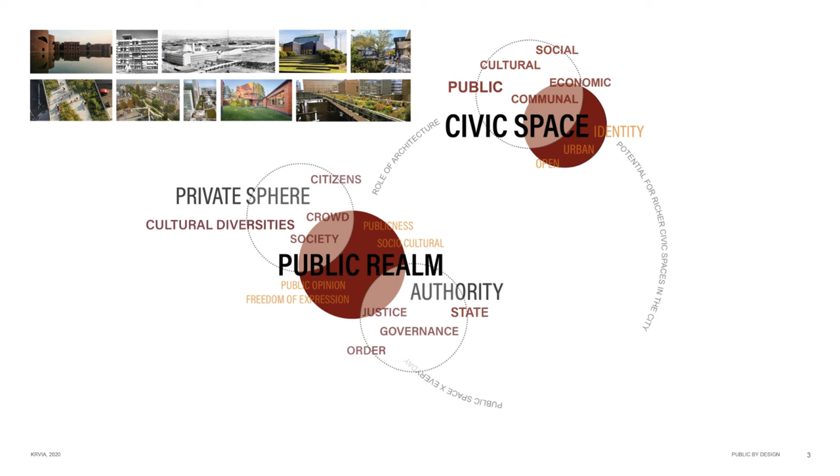For municipal architecture to truly identify as civic, there needs to be a blend of strong sociocultural aspect and a sense of architectural identity to it. The municipal architecture that is being built today lacks the same. These buildings become disconnected objects in the context, performing its bare minimum role in society. They even lack the aesthetic appeal when it comes to human perception.

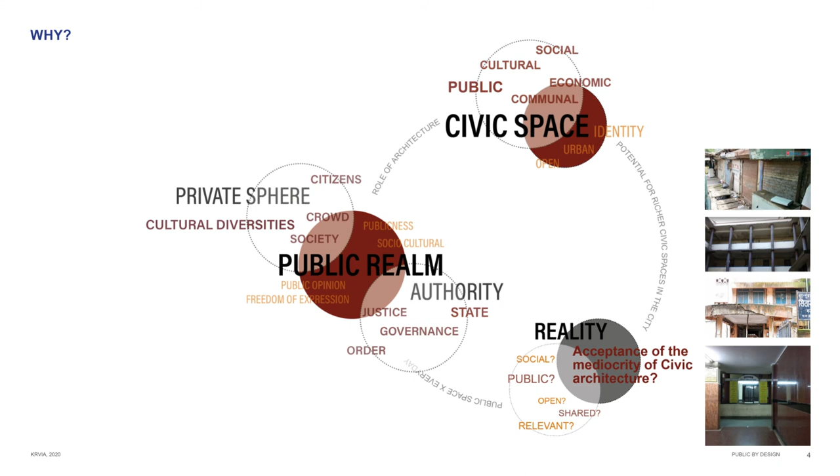Several such mediocre buildings exist in the case of Borivali. Borivali is a part of suburban district of Mumbai. It is one of the important halts along the railway network of Mumbai.

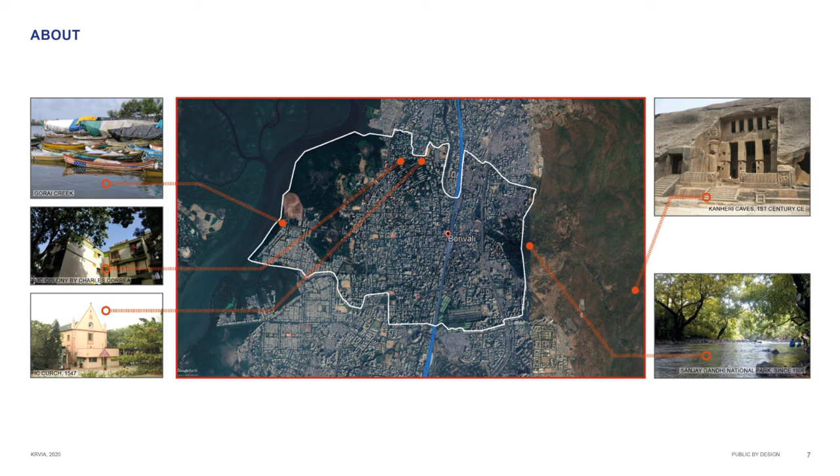Borivali sits between the Sanjay Gandhi National Park and Gorai Creek, which extends from the Arabian Sea. The significant architecture in the surrounding includes the Kanheri Caves, which date back to 1st century, Immaculate Conception Catholic Church building from the mid 16th century, and semi-public housing built by Charles Correa for Life Insurance Corporation of India in the 1970s. Due to the rapid development of suburban areas in the last 3 decades, today Borivali is as culturally diverse as any other region of the metro city.

The Borivali railway station area is the most active part of the region, a city center in a way. This is also the area which has the clusters of municipal buildings that are part of the context for this thesis.

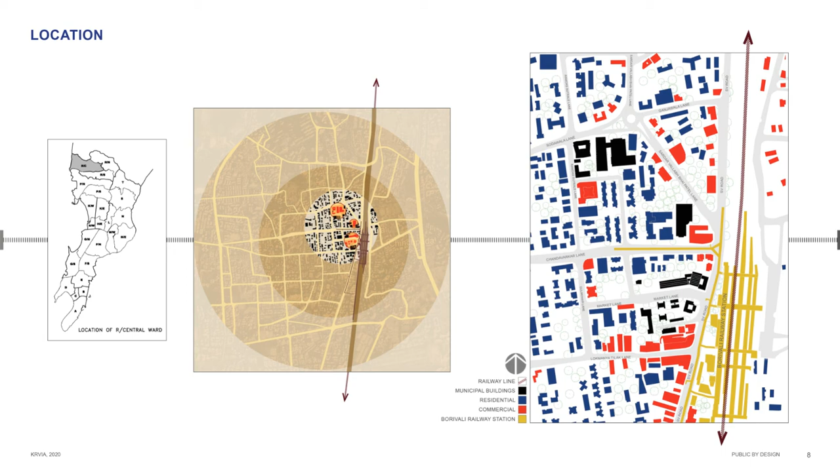The primary site analysis was to understand the public nature of the site, what causes the density, what makes it the public hotspot of the region.

Various transit networks such as local bus, local train, cabs, and vehicular traffic collide with each other. As against that, there are public buildings such as railway station, court, police station, market, which act as the primary forces of the site, which finally results in the high concentration of human density in the area. And the site is not equipped to handle such a heavy form of movement.

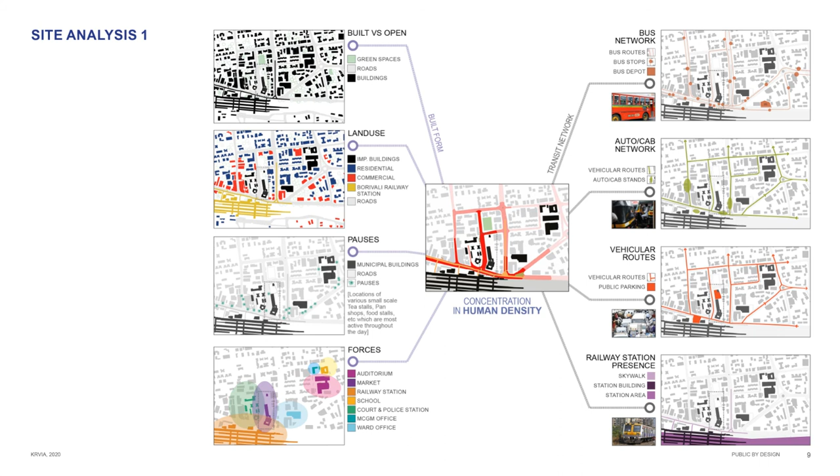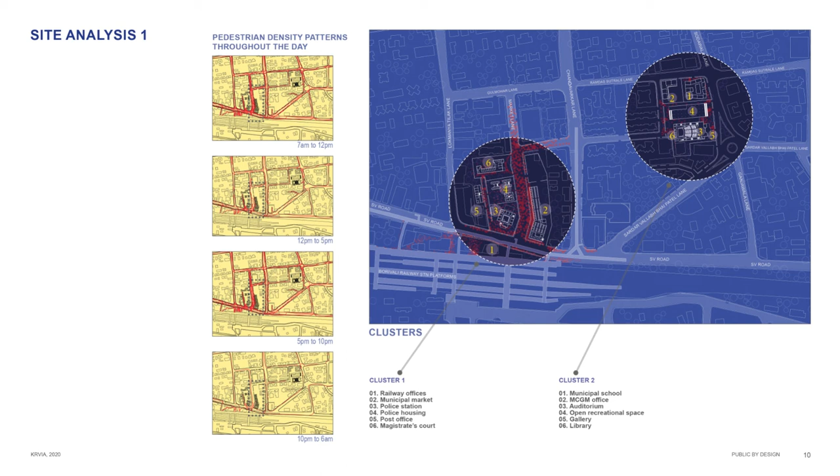What struck me the most on the site was that these municipal buildings exist in the form of various clusters. They were not built at the same time but were planned together as a program. The study further goes into analyzing these clusters.

The primary cluster consists of the municipal market, police station and police housing, magistrates court, and the post office. All these buildings are divided by two main alleys, which stimulate the primary pedestrian and vehicular movement in the cluster, namely the court alley and the market alley.

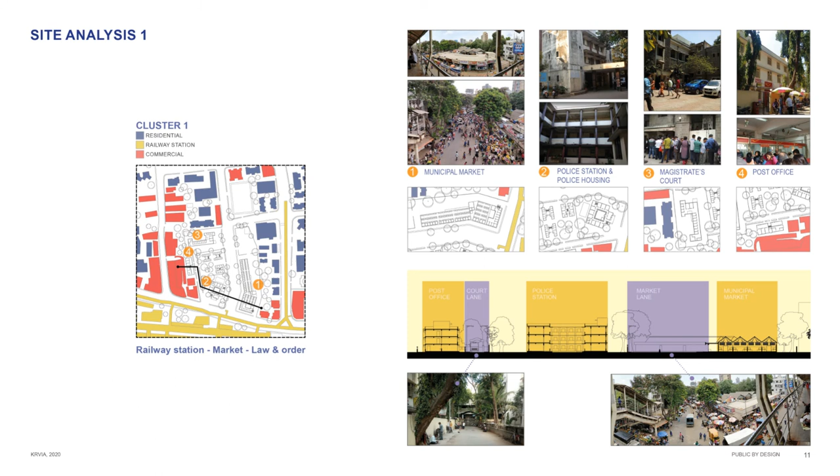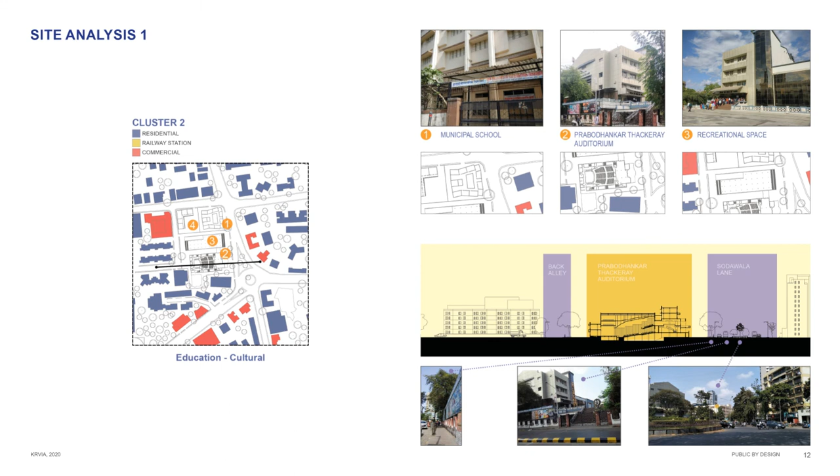The secondary cluster consists of municipal school, a theatre, library, and art gallery space. All these buildings are divided by a compound wall. This cluster is away from the station area, hence the density is lesser.

As cluster 1 is more public and crucial, the study further narrows down the site context to the BMC market area. It has potential to transform into a well organized and unique-to-context kind of public space.

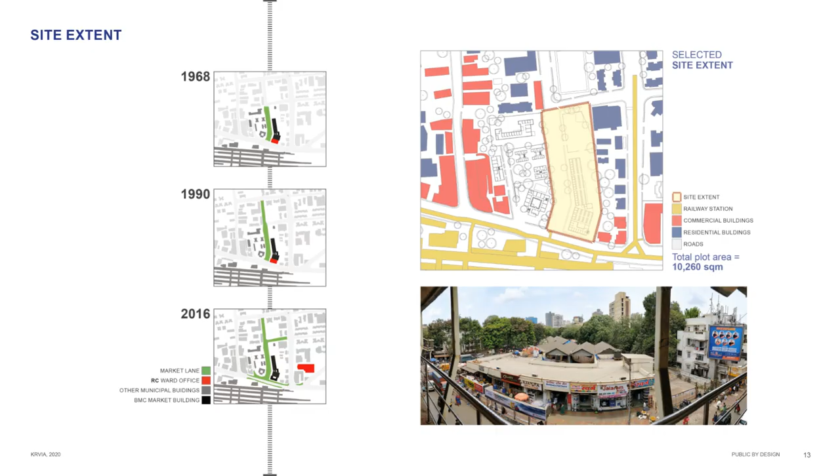The market currently functions in and out of the building. The formal market takes place inside the building, whereas informal market takes place both inside and outside the current building. The market lane is a place for the informal market, loading and unloading of goods, vehicular and pedestrian movement, entry and exits to the adjacent civic buildings, and seasonal festivals.

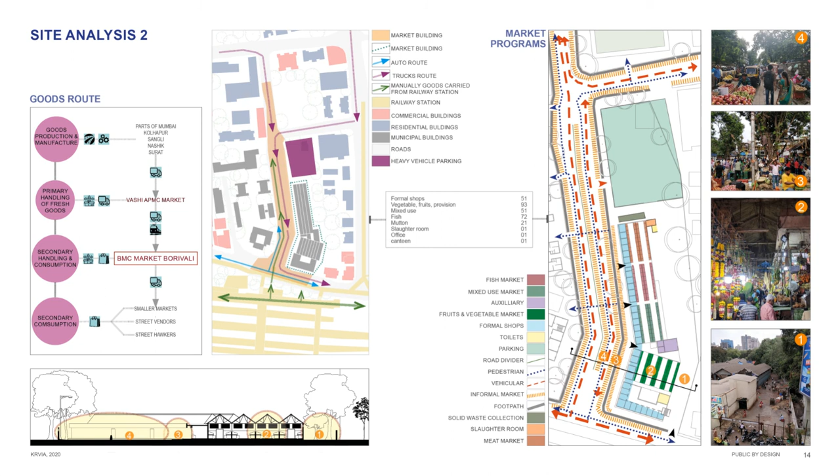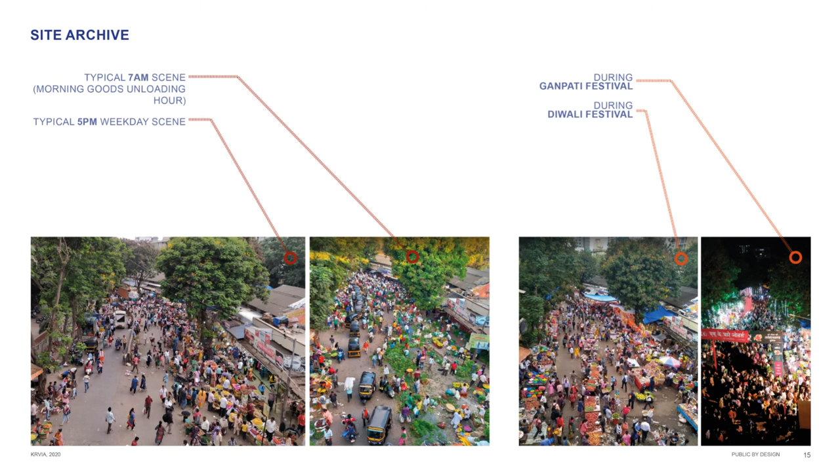It results in overcrowding and traffic congestion in the street, versus almost being vacant inside the building. This is an archival of the volume of the market alley as it swells and shrinks throughout the day. Especially during festivals, the market alley reaches its maximum capacity.

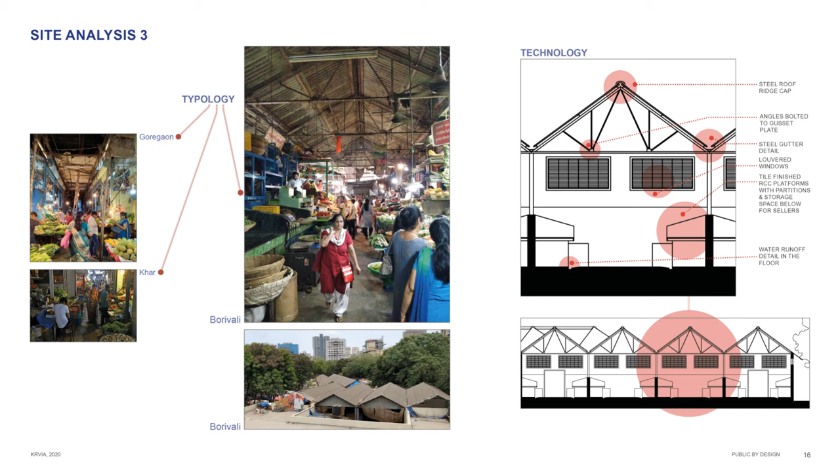Further analyzing the BMC market building structure, this structure was built in 1968. The typical low cost and easily built steel trussed structure, which is common for municipal market typology of that time. The traces of the same can be seen in the few remaining old market structures in other suburban parts of the city, namely in Goregaon and Khar railway station area.

So the strategy is to redesign the current municipal market, accompanied by additional programs such as recreational spaces, learning spaces, and working spaces, with better connectivity to the existing infrastructure and better pedestrian friendly public movement.

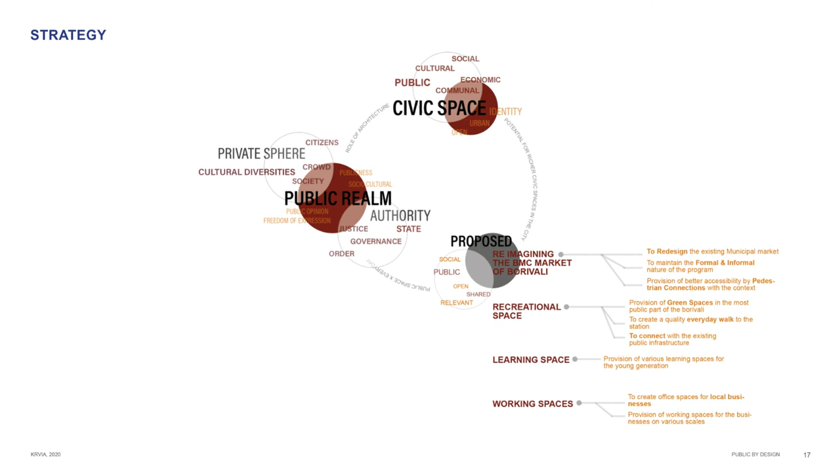The initial process of designing included study of historical nolli plans to understand the relationship between open and built spaces, creating various geometries responding to the context.

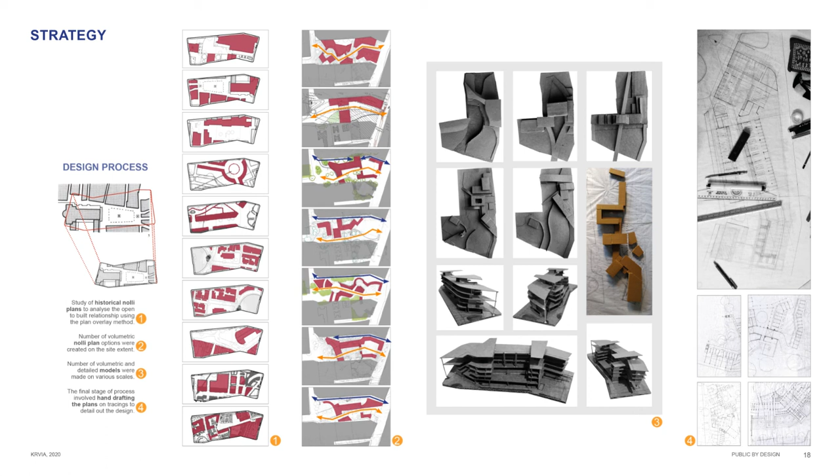Volumetric and detailed models at various scales were created, and finally a number of hand-drafted planar drawings to translate the volumetric ideas into architectural representation language. This is a volumetric representation of the final design strategy.

The building responds to the immediate context buildings such as the police station, court, and railway station. It connects to the existing skywalk to stimulate better pedestrian movement on the upper level.

The building volumes are divided by alleys and walkways to make the ground floor more accessible and pedestrian friendly. Green space on the upper terraces is connected by pedestrian bridges, which form courtyard spaces in the central alley.

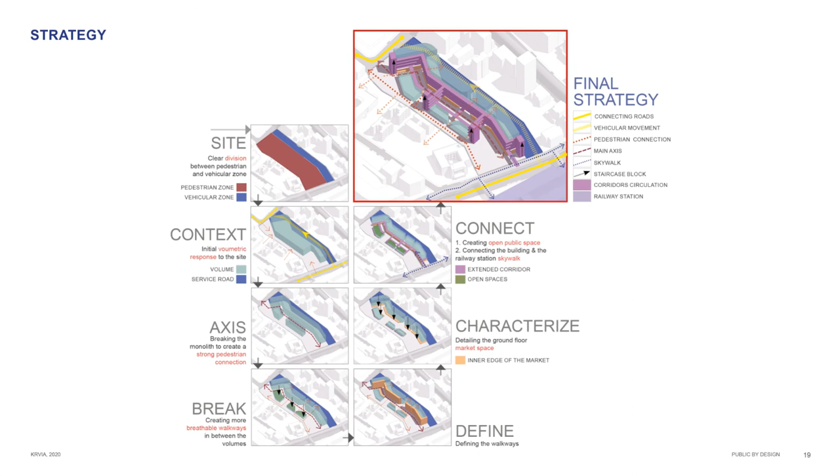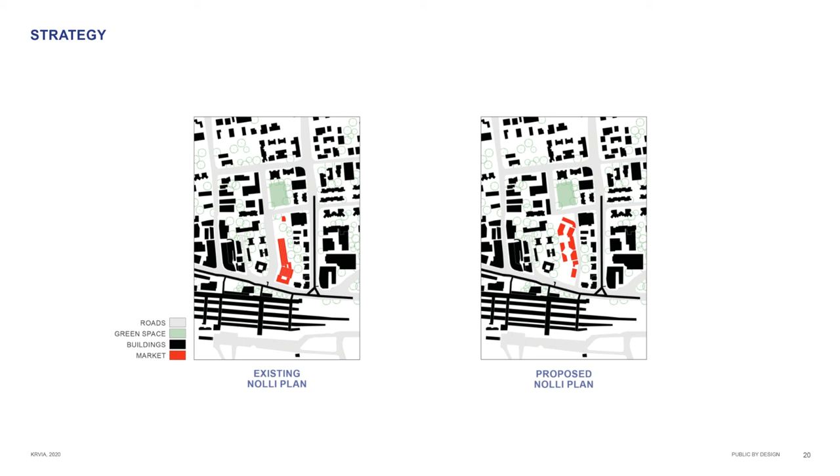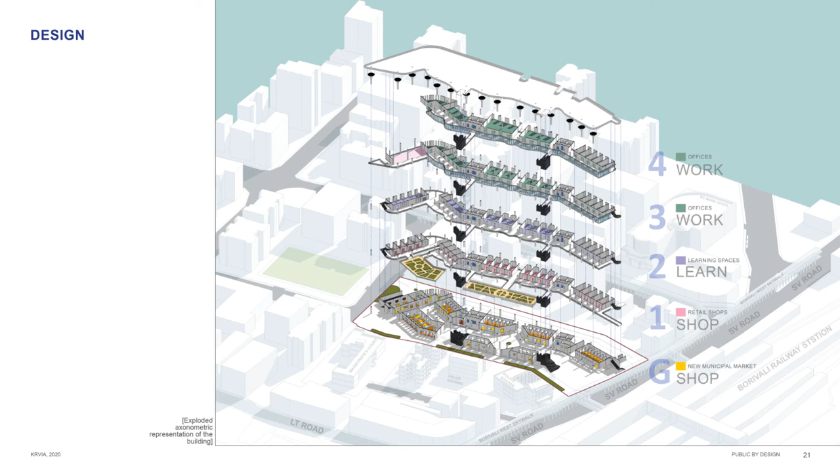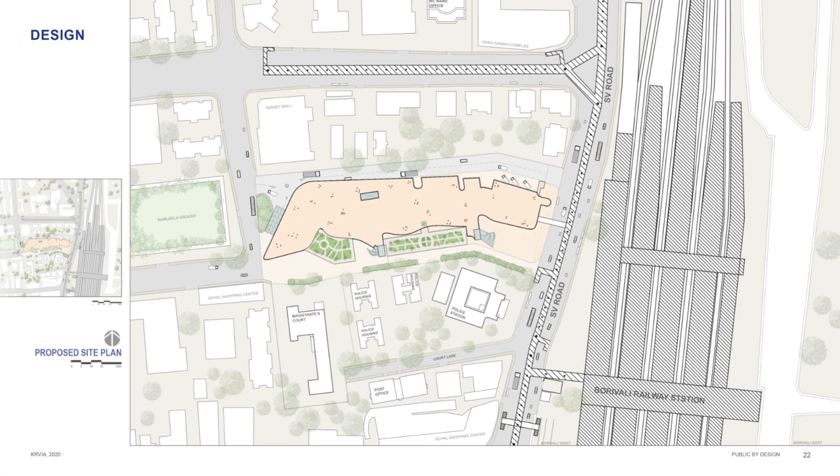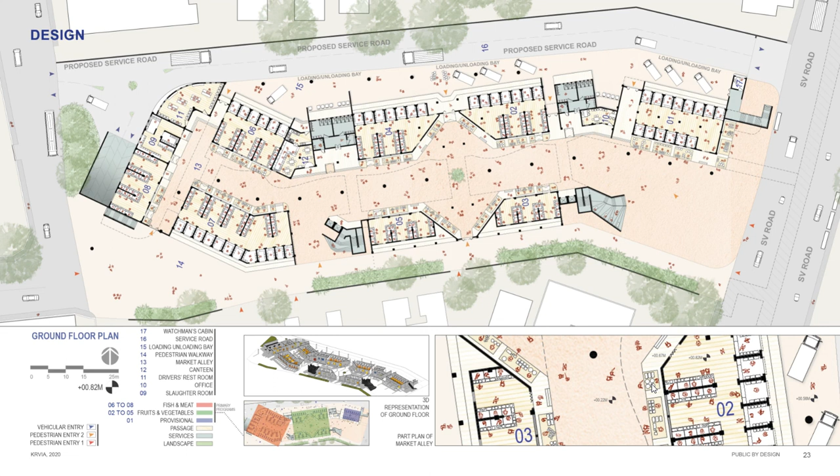For informal markets, sitting platforms are designed along the inner walls of the market alley, inspired by the traditional Otla system. Canteen and resting areas are provided for the hamals and other workers of the market.

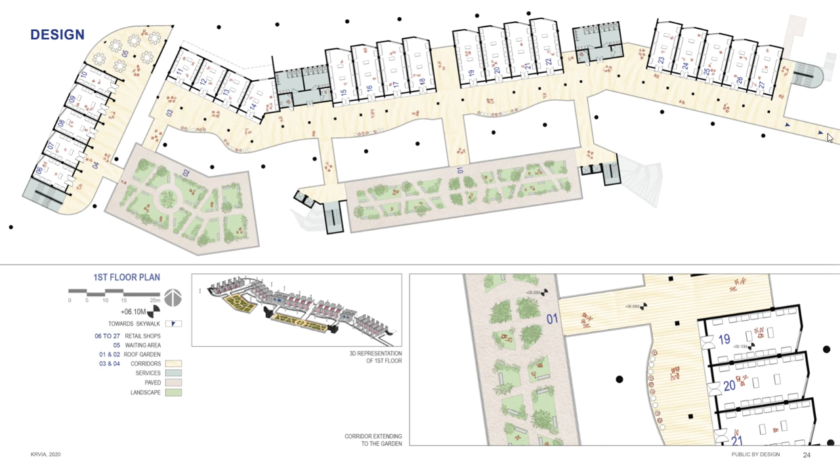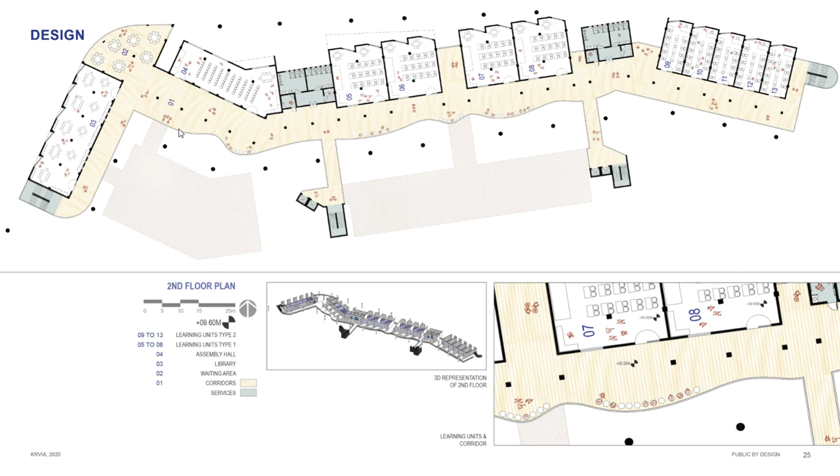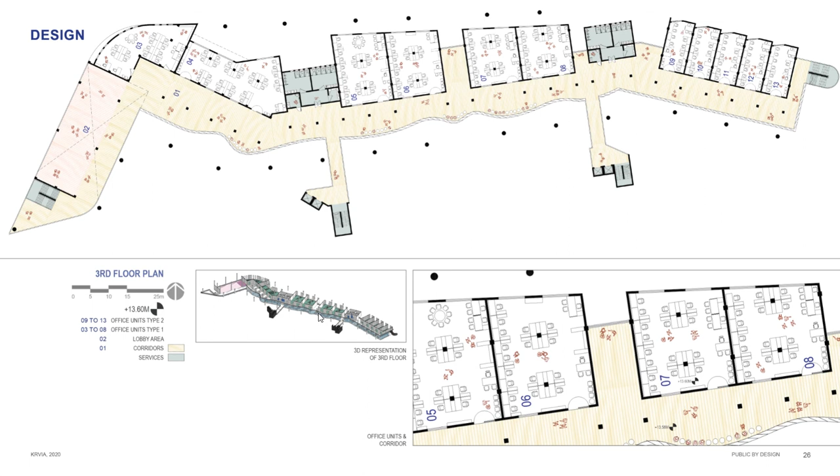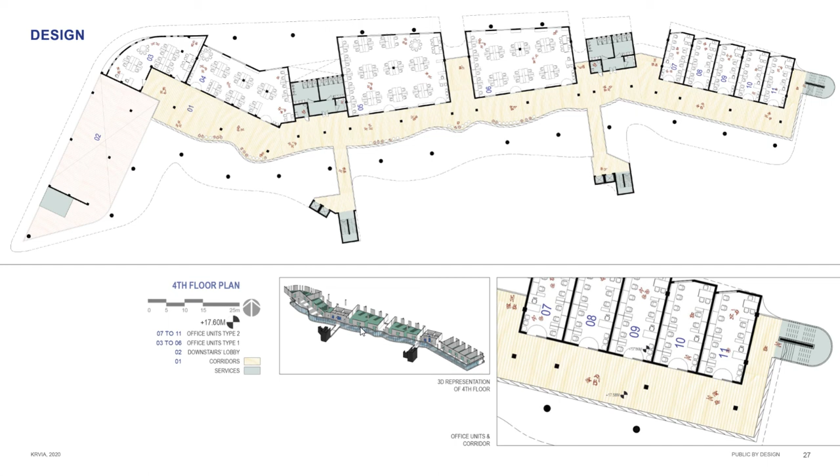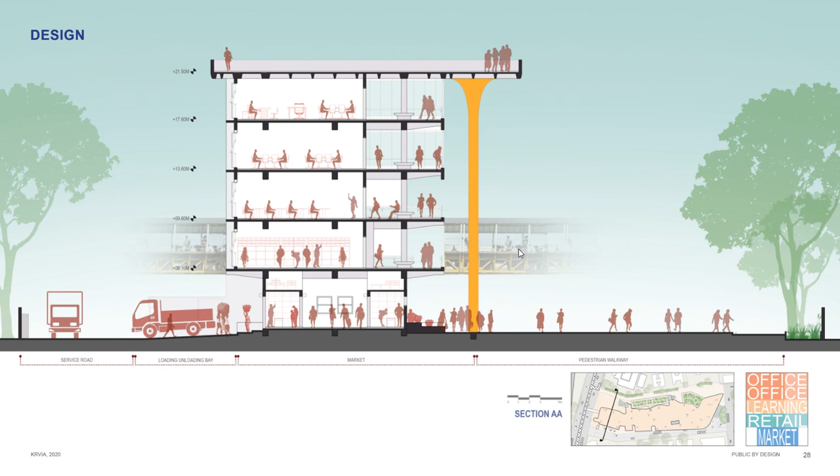The skywalk can be seen in the elevation, which connects to the building on the first floor, as one goes further to the east of the building.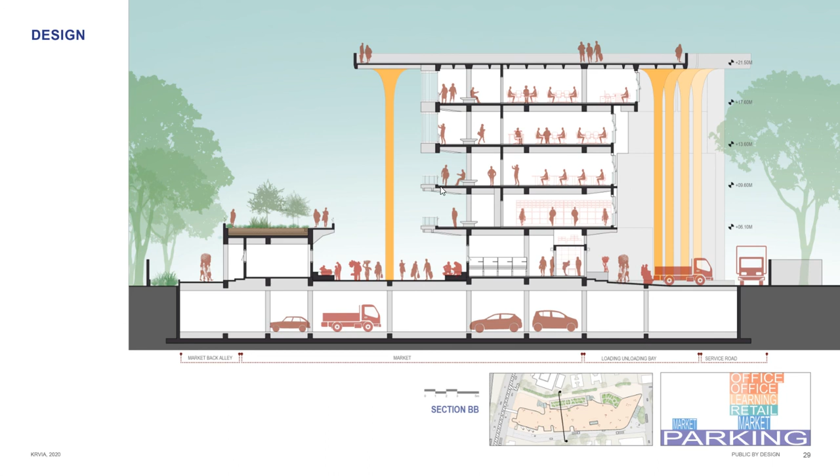This section cuts through the second part of the building, cutting through the service road, loading and unloading bay, the vegetable and fruit selling block, and the pedestrian street, respectively. The upper floors consist of retail, learning, offices, and a roof terrace.

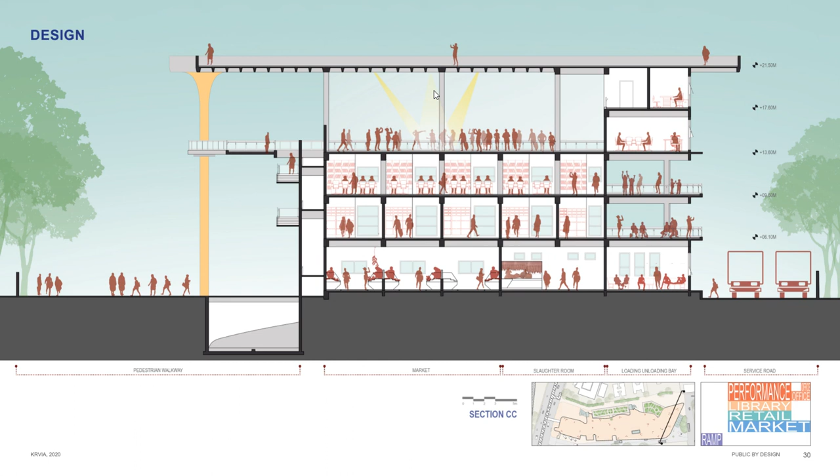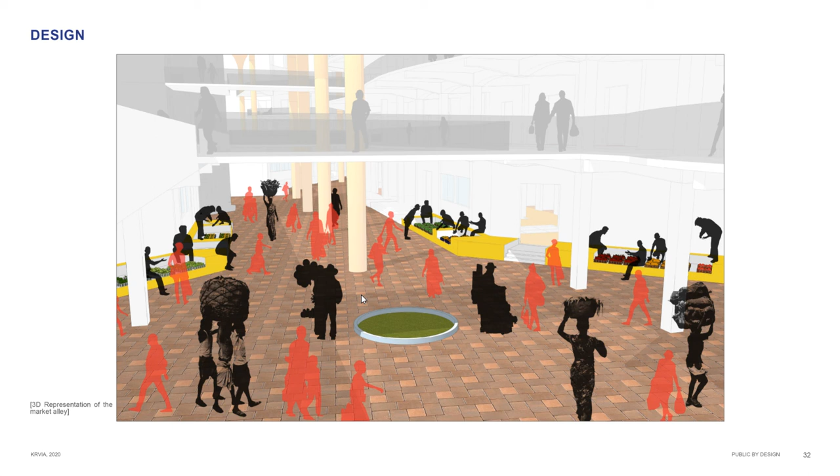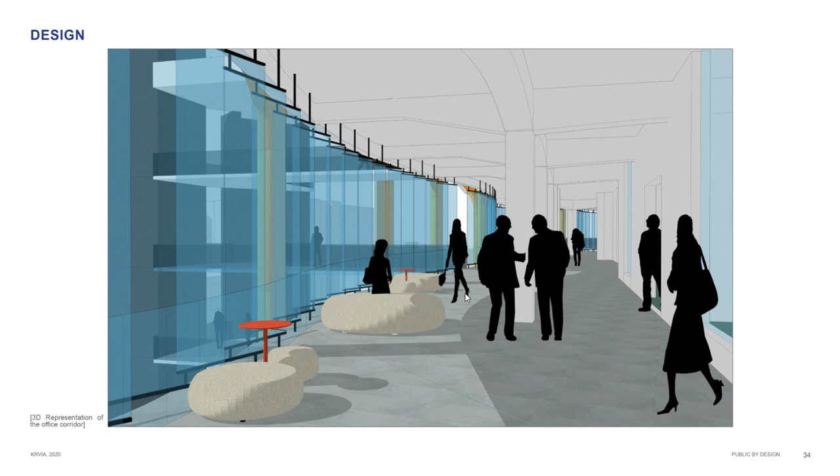The 3D representation of the office corridor on the third floor, which with the semi-open glass partition is alive with public activity throughout the day.

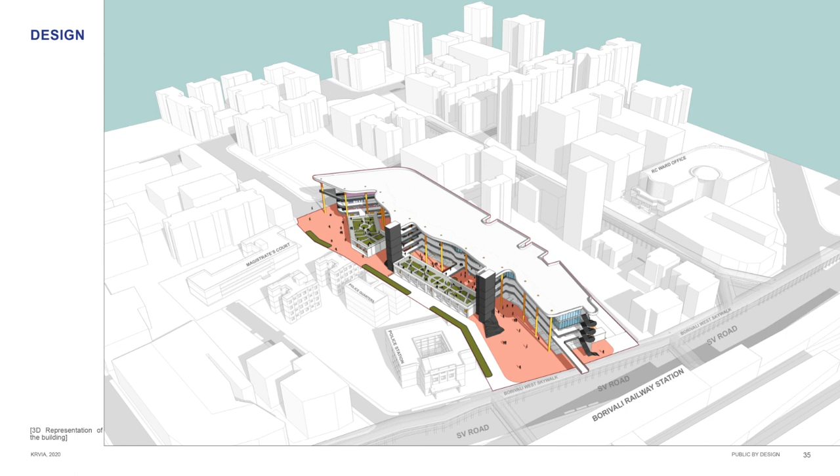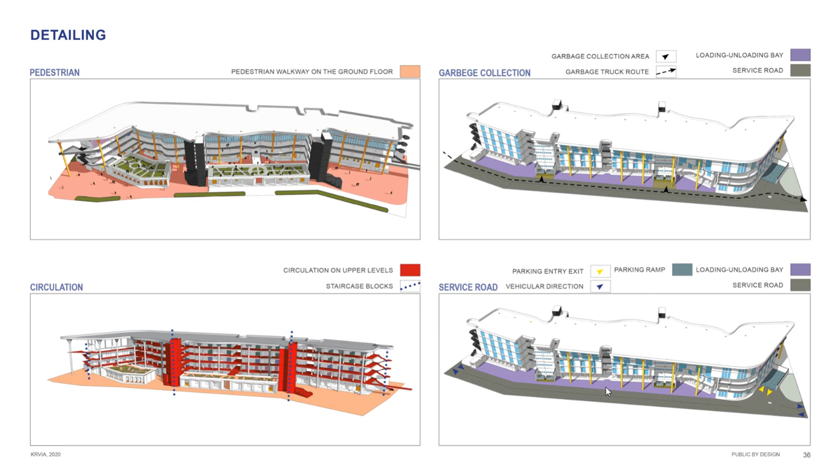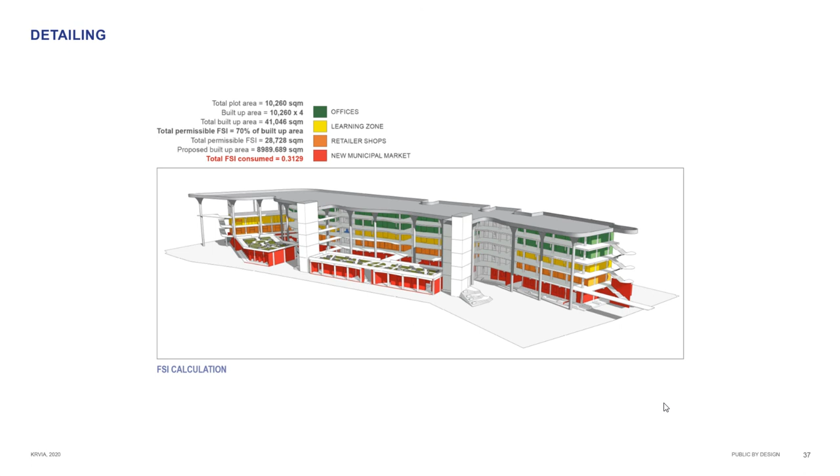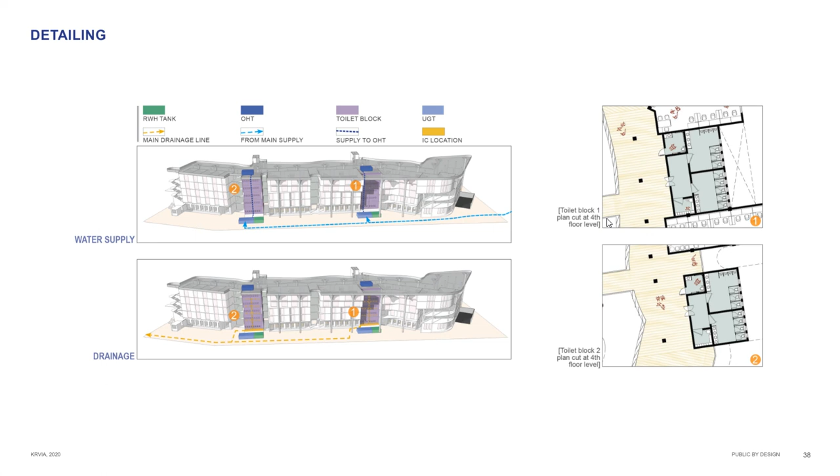The building has two toilet blocks. The drawing shows the typical plans of two toilet blocks on each floor. On a single floor, two sets of both male and female compartments with handicap toilets have been provided.

There is a green roof detail of the roof terrace on the first floor. This sits on top of the two market blocks. It is completely open and accessible for pedestrians.

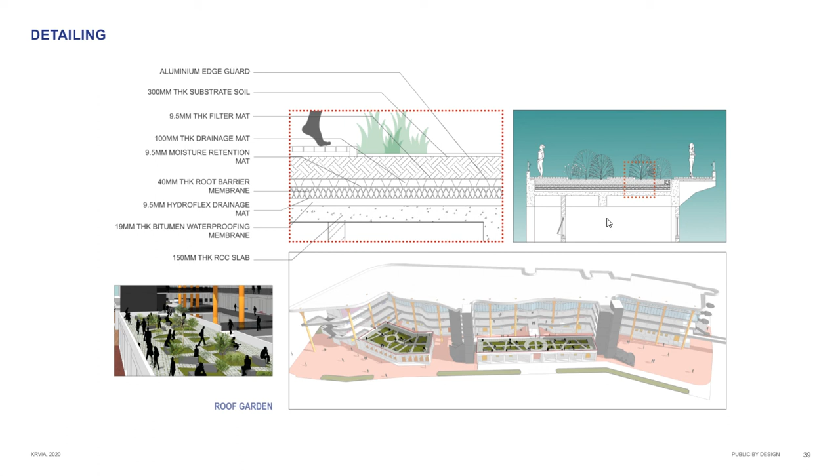Rainwater harvesting technology: as the city gets 4 months of rainfall, a sustainable system is introduced where some of the columns carry water from the terrace to the collection tank. These are hollow RCC columns with a water carrying pipe in between.

The top curved capital look of the column gives an aesthetic definition to the overall elevation of the building, as well as supports the big RCC roof.

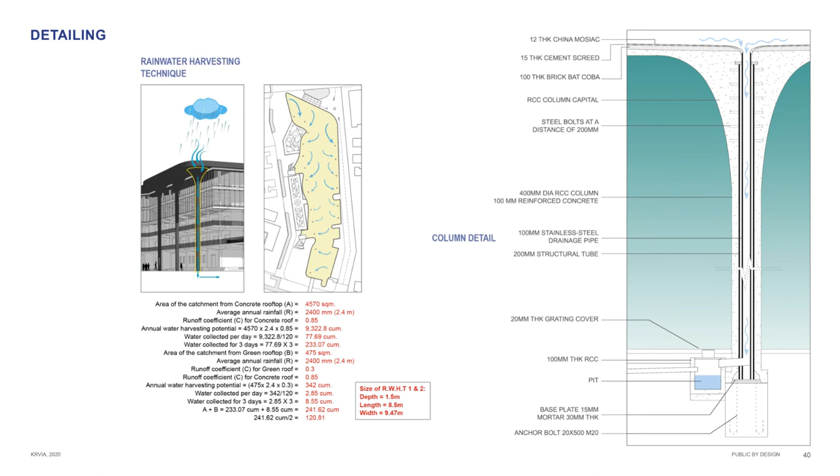Sectional details: this sectional detail includes the front facade of the building, which passes through the corridors and the central market alley. It further details the parapet wall, the glass partition, and the steel and glass railing on the upper floors, and the informal market platforms of the ground floor.

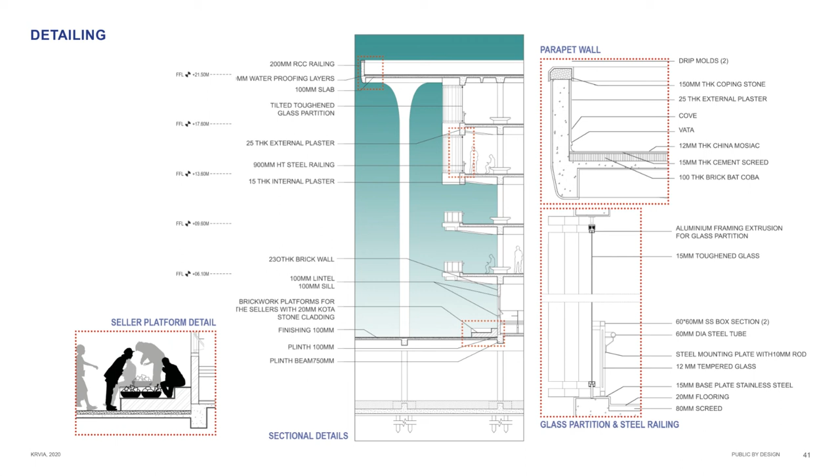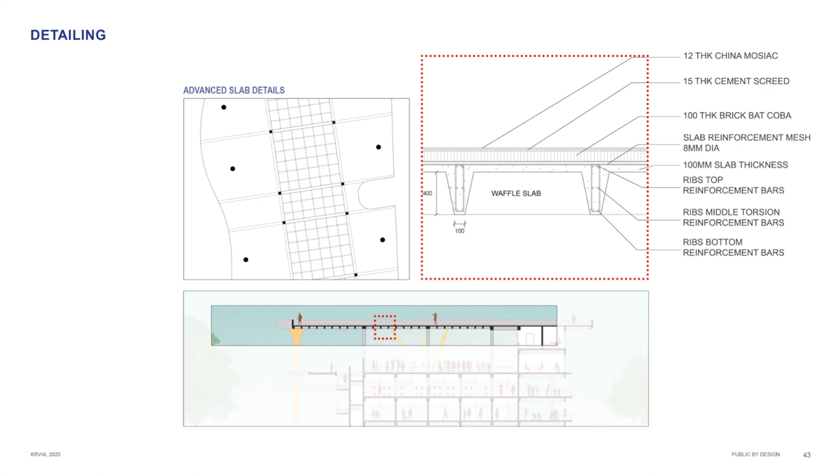Advanced slab details: for the top slab of the building, a design has been introduced to decrease the overall weight of the slab and add additional aesthetic appeal. The central shaft of the slab is hollowed out by waffles, as the column capitals need the planar surface area on the edges of the slab.

The sun shading diagrams during the summer and winter. The facade elevation diagram represents the heating of the floor surface using a contrast color scheme. And finally, the sun path curve representations that helped in designing the building.

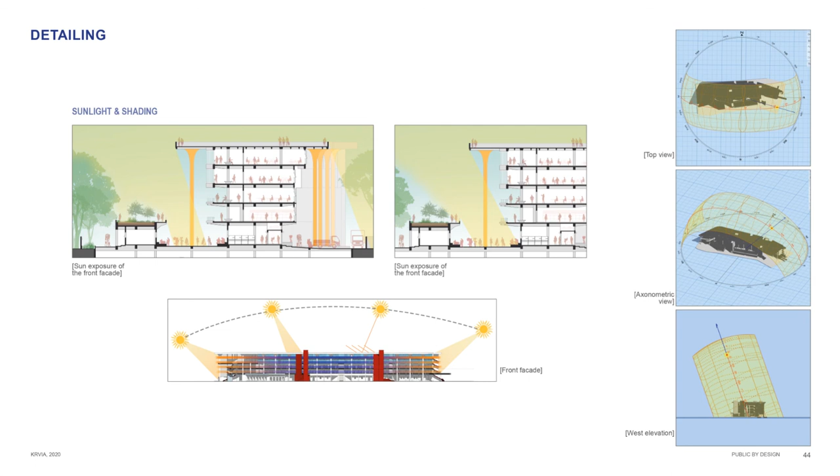I'd like to conclude the presentation with this statement: what we do to our public spaces, we ultimately do to ourselves. Thank you.